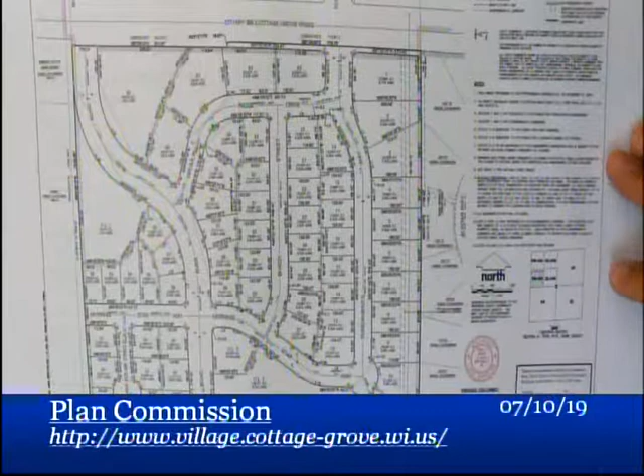Can we move Alex a little bit? That does a pretty good job of showing the cemetery. Is anyone from the cemetery here? This looks like the rear lot line of the cemetery. So it's quite a bit of it, actually, that's right along public right of way. There's maybe a little gap of private property in there.

So where's the bike path? It's on the other side of the road, which is the east side. The bike path extends along here.

Does the fence make sense? You can't really see that at all. Mike, if you point, just point on the screen when it was made, way back then. It's been a hot topic over the years. There's really a fallen down brush there. There's no clarification on who's maintaining it, which is what's even brought up tonight.

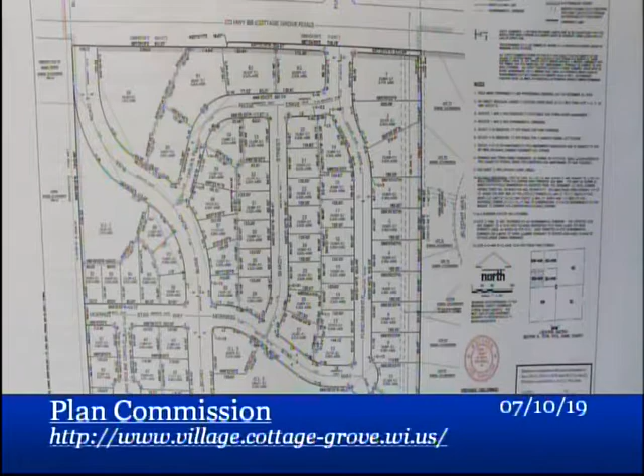My thought is that I would take item 12 and add to it clarification of the type of fence, this is a cottage style road, this is the location, and the cemetery's responsibility of maintenance. The Buss Road is here, and the bike trail's on this side.

So the only thing abutting the cemetery, I believe, it ends here. Is that sidewalk shown, on this side? The white area, that's sidewalk, yes. All right, so then it would be a fence along that sidewalk.

Where's the bike path? Cemetery in the past, that's the kind of bike path people wanted to cut through the cemetery, and it created a barrier. Yeah, exactly, at the end of our property, the brush that's there creates a barrier right now, so it's unlikely people are using it.

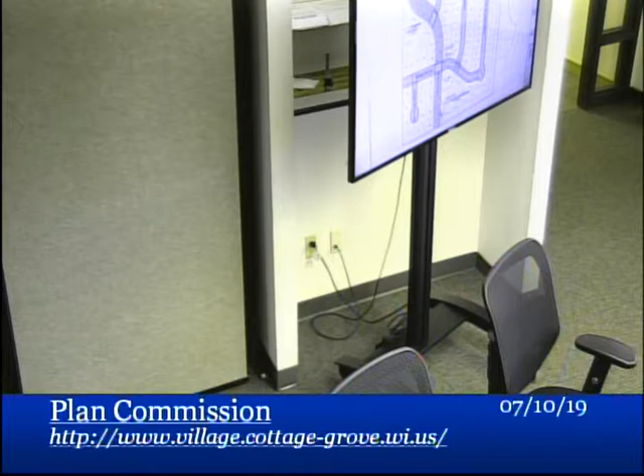I'm Jane Ring, we live on Buss Road. So my question is, up here, is that like a zigzag kind of thing? It's not going to go straight on Buss? Are you putting a stop and go light there? Are you putting a roundabout?

How's this attaching to the existing Buss Road? There's 67 feet that was dedicated from the center line of Buss, going east - they still aren't perfectly aligned. When we get into the final detail with these guys, we'll either have to put in an 85-degree angle or look at other options. So in 2021, we're planning things with it.

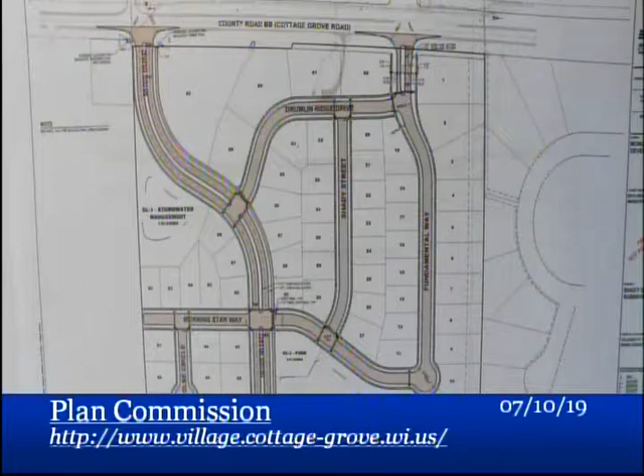We've got a TIA from the elementary school indicating we meet 4-hour warrants at that intersection. We have an impact analysis from the school indicating that when that happens, we're going to meet what's called a warrant analysis, a need for signals at Buss Road and Cottage Grove Road. So yes, there would be traffic control there, we'll have to have alignment with that, it will not be offset - the dedication helps with that. And you asked if it's signals or roundabouts - I think we'll have to have a separate public hearing to decide that.

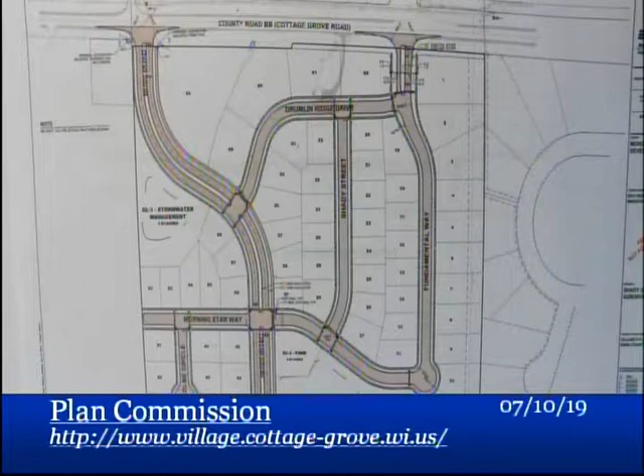So then Mike, if the property to the south ever did get developed and Buss Road goes through, would that one area by lot 40 just remain open like that, do you think? Or I know it all depends, but — in that particular location, typically we would come in and continue it on, but I think if we keep a plan for mid-block pass-throughs on the island, so they're not having to go down to the intersection for a U-turn just to get out, probably makes a lot of sense.

Okay. Then I had a question as far as lots 10, 11, and 12 — are those on Fundamental Way then, and not on Morning Star Way? Like, what would the address be?

Whatever the homeowner decided, they don't decide the addresses - they're assigned by the post office.

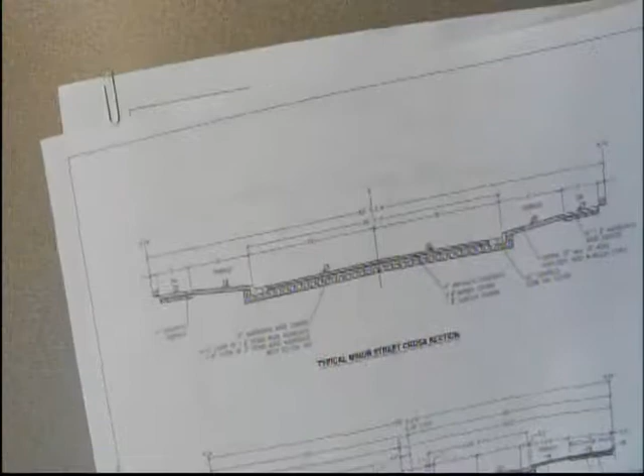Go ahead Tomas - I think it's 36 feet face-to-face. If I may change the view here a little bit, let me see, I'm trying to get used to this projector. Okay, can everybody see that? Yes.

What you see there is the typical minor street cross-section. This would be Fundamental Way, this would be Morning Star, Shady Street, and Max Colby Circle. All of those will have that same cross-section, which will have a 36 foot face-to-face width of the road, so the driving lanes would be 18 feet wide each.

So does that mean you can park on both sides and still drive through? Yes, I would assume it's plenty of room for roadside parking on both sides - assuming that, because a lot of people park on both sides, and then if you have an ambulance or a fire truck or something.

Each car will take about 6 or 7 feet of the road when they're parked. So out of 36 feet, you would lose about 14 on both sides when you add them together. So there's still plenty of room for a very large emergency vehicle to drive through with no issues. The village would also administer how parking is handled during winter months, which is a little different because of snow accumulation.

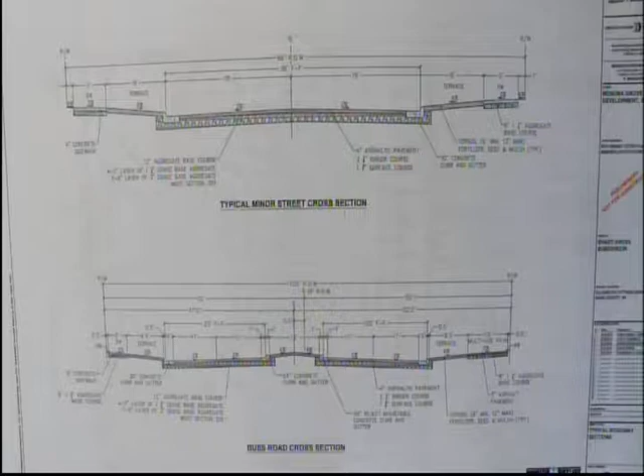So all the roads are the same width except Buss Road, as far as that goes? Yes, in the Shady Grove subdivision - only in Shady Grove right now, because you haven't continued into the other. Did I answer your question? Yeah, because that usually ends up being a problem where it's congested and nobody can get through. Subdivisions in the past had 32 feet or 29 feet of space on some roads, but 36 feet is pretty typical - it's the typical 2-side parking road that we put in.

Which is not like Oak Street, right? Oak Street's better - Oak Street is really wide. Oh yeah, that's probably 40 plus feet. Good, yeah, that's good. Okay.

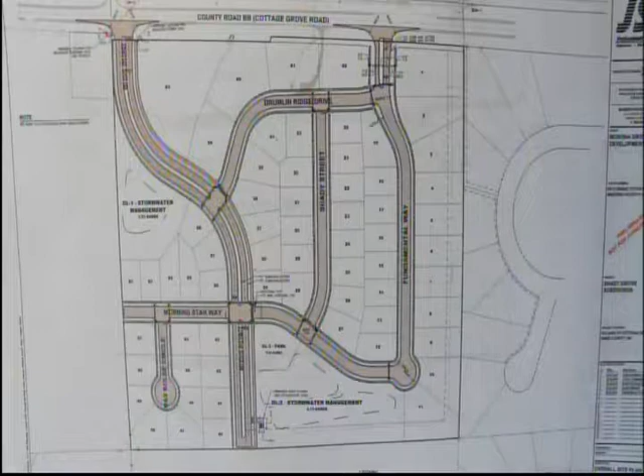All right, that's going to be a lengthy one, but I'll make a motion to approve. Do we want to close the public hearing? It was closed about 40 minutes ago. Yes, so I'm going to make a motion to approve with staff conditions, amending item 12 with clarification of type of fence, location of fence, and responsibility of maintenance of the fence.

And then also adding in looking into shortening the median to the south and/or looking into mid-block pass-throughs, subject to the conditions from our village engineer. Second. We have a motion and second. Any further discussion? Having heard none, all those in favor? Aye. Can you repeat that, Alex? Aye. Thank you. All right.

Item 10 is the opening of a public hearing, the opportunity for the public to provide input regarding the request from the Monona Grove School District for approval of a request to rezone approximately 53.7 acres at 4490 Buss Road from RH Rural Holdings to SR4 Single Family Residential, and for a conditional use permit to allow an elementary school as an institutional land use. So the public hearing is open.

So this is the current site. Off to the left is Buss Road. Down in the lower left would be Glacial Drumlin Middle School, and up towards the upper right is the development to the east.

Bob, you can use your cursor. Thanks, Andrew. Is there a microphone I should be talking into? Just to collect it for the video. Can everyone hear me okay? What you're seeing on this drawing are the existing structures and the tree line, just to give you some reference of where we're at.

So this is the proposed site, and again to put it in context, the existing tree line is somewhere within this area. This represents the existing school. The drive, or the stippled dark area you see, indicates drive, parking, and some playground area.

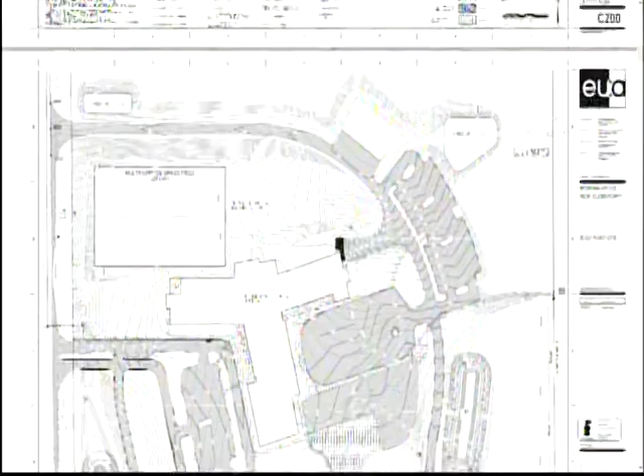Let me see if I can get to a different plan that might have... that's the proposed school, not the existing one. Trying to find one, sorry—we'll just stick with that one for now.

So north is up on the page. The school is entered off of Buss Road. We've got visitor parking along with a loop for parent pickup and drop off that accommodates about 50 cars able to loop around here. We also have a connecting road that goes over to Glacial Drumlin and connects up to their existing parking lot. There is also a loop that comes around the building.

This is primarily for bus traffic entering and exiting the site, so this is parking for the bus area. I'm not sure how that shows up very well. You'll notice that some of that parking is diagonal—that's for the buses. Basically, they pull straight in, and when they leave they turn their wheels and drive out, not backing up or anything.

Students enter on the right-hand side where the door is, and then the buses will depart. There is an opportunity, if they are going to Glacial Drumlin, to navigate in that direction, but for the most part the buses will be leaving the site and coming back in a different direction. That gives you the traffic flow.

This parking to the northeast is mainly for staff, and we're showing the extension of the bike path that comes through the neighborhood to the northeast onto the site. We're showing some stormwater retention ponds, and we're starting to indicate some grass area that could be for play fields. We're not necessarily putting in an athletic structure there, but it's just space for students.

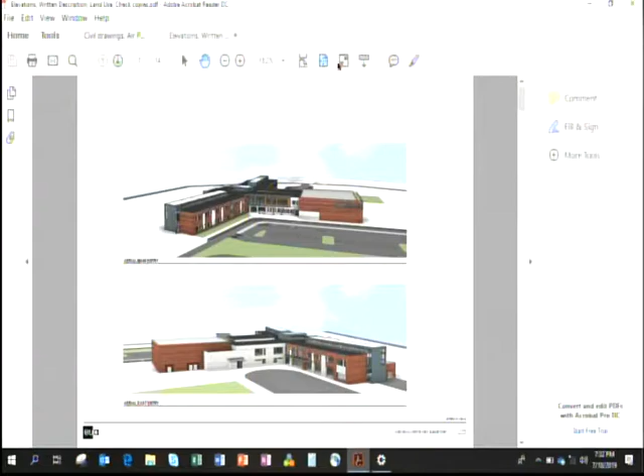So just kind of an overview of the site. Let me get to this. Relative to the building, give you a little bit of an overview of what you're looking at here.

If you remember, I talked about the entrance off of Buss Road for parent pickup and drop off. That's this loop that you're seeing, and this is that visitor parking. We are looking pretty much directly east in this view. This is the main entrance for visitors and those students being dropped off or picked up by parents. The entrance is here.

The wings that you see both to the east and west of that main spine are the academic learning spaces. It's a 2-story building. We've got academic spaces on the first and second floor here, and academic spaces mainly on the second floor, with some specialty like music and art on the lower portion. At the main entry, up above, this is the library, the IMC, and down below we've got offices. The rectangular box you see here is the gymnasium.

The view down on the bottom of the sheet is looking almost directly to the west. This is the entrance where students being bused would exit and enter the building. Again, this is the area where the buses would be parking. This is one of those wings, again relative to learning environments being on the second floor and the lower level. The IMC, and we also have art and music on the east side you're seeing here, and then again the gym box in that location.

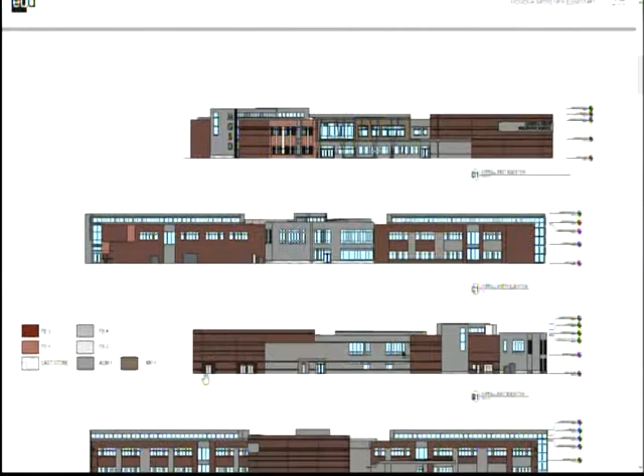There are some straight-on elevations that are a little more difficult to pick up what's happening, but they give you an overview of the overall elevations. We use these mainly for constructability information. The 3D images are really to give you a sense of what the building looks like.

As far as material on the building, kind of the learning environment aspect of these two wings, the first or lower levels, first and second levels. The orange that you see is a brick. That's not necessarily representative of the actual color—this is meant to be more of an artistic rendering of what that may look like. We've got some white brick as well, and again it's not necessarily white, but it shows up that way here. We're also proposing some metal panel on the building, which we're representing in that gray.

What you're seeing here is a clerestory, basically a higher roof elevation above that second floor that allows daylight to come into that second floor space. We're also wrapping that around the ends, doing the same thing on the other wing, so it's symmetrical in that regard.

The brown that you see here, again, is a metal—a wood look metal plank, if you will. Being that it's the entrance, we wanted to warm that up a little bit. I may have talked a bit about the theme or concept for the building last time, relative to the woodlands, the wetlands, the grasslands. We're trying to bring some of that to the architecture on the outside as well. We're also doing that same type of thing with that wood at the east entrance, off of the bus area. It just doesn't show up here because it's underneath that canopy piece.

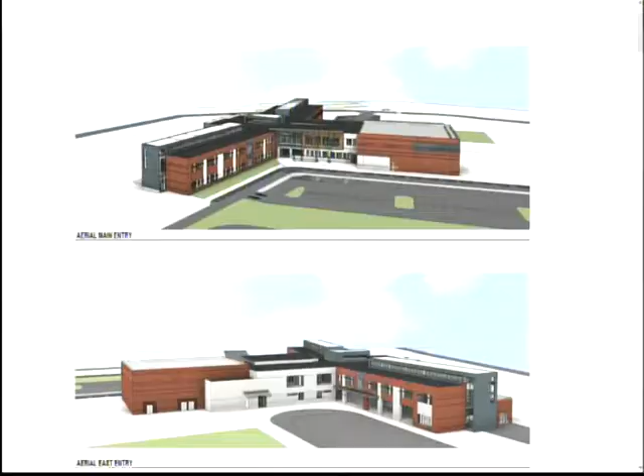Do we ask now? Sure. Can we have your name again? I don't know if we got your name. Jane Ring, please. We live close, right on the corner of Buss and Lane Street.

So when people access, and they're saying they're going to come by car from Cottage Grove Road up Buss Road, where is the turn going to be? Is it going to be right across from Lane Street so that everybody's turning, or is it going to be further south? I believe it's south of that street.

The district did purchase an additional just shy of 15 acres of the Blair property to the south, and so we were able to, per conversations, bring the turn before you get to Lane Street—closer to Cottage Grove Road, closer to the Masted property. Buses will come in and staff will obviously use the north driveway. The majority of the traffic you should be experiencing will come in at that southern driveway, which should be below Lane Street. So this is, Andrew, help me out here, but I believe the street we're talking about is right here.

Looks like that's close. Yeah, I think it's north of the existing property. I believe that's the cut, so that existing road you're talking about is right here. That's Lane? I believe so.

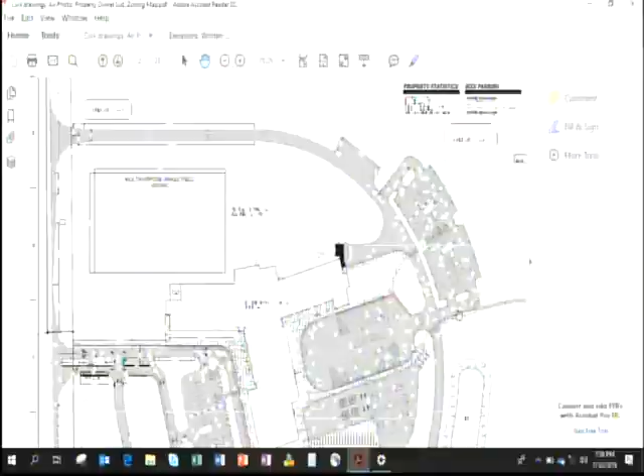So the access is going to be down here. It appears as though there's a curb cut here. I don't have the full map, but it shows here.

So this will be closer to the existing current road, it will actually be south of that Knoxville property before it. So we won't have everybody trying to get in before us. And then when they wrap around, it'll be the same as at Taylor Prairie, where people come in, they have to turn around and they have to turn to the right, not the left.

They'll have the opportunity to go in either direction. Because I know at Taylor Prairie, they only let you turn out to the right, because they don't like people making a left-hand turn there and having more accidents and problems.

Where is the bus entrance at? So the bus entrance is further north of this particular entrance. Or is it still south of the lane? No, that will be north, actually, of Lane.

So that's right by our house. They'll be passed by your house.

So here's the entrance for what I'll call visitor, parent pickup and drop off. This is the entrance for the bus. And I believe this is the road that's in question, so it's basically almost smack dab in the middle. So the bus entrance is basically going to be right across from us.

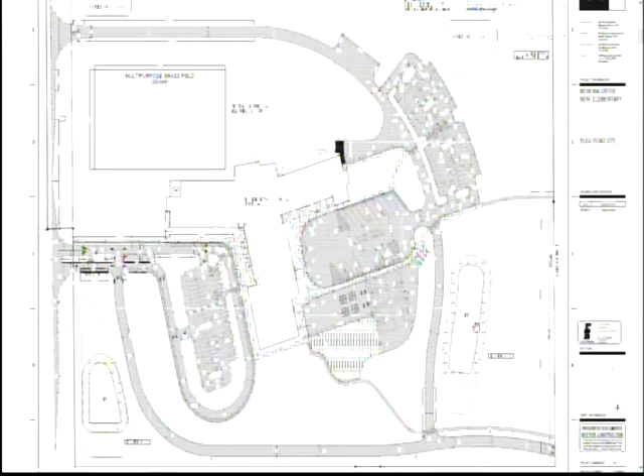Just so I don't have to think about this now - when you get to the point of widening Buss Road, are you going to put sidewalks and curb and gutter on our side of the development, not just the school side?

Certainly to the north, there's a parcel that's in the village on both sides of Buss Road, but to the south, where it's in the township, it's really up to the town to put sidewalks. We're still in the town.

Thank you, I have one other question too. We have a septic system - is there plans to hook up any sewer onto our side other than just the school side? The school is on this side of Buss, we're on this side. Is the village extending sewer service to your side? Correct, not in this plan.

Because we're still village - no, we'll still be the town, but across the street will be the village. Got it.

I think I just had one more question, Lori Miller again. I thought I saw a plan at some point that never had any drives coming out onto Buss. Was that a dream, or did it plan? Was that hopeful thinking? I think it was probably hopeful thinking.

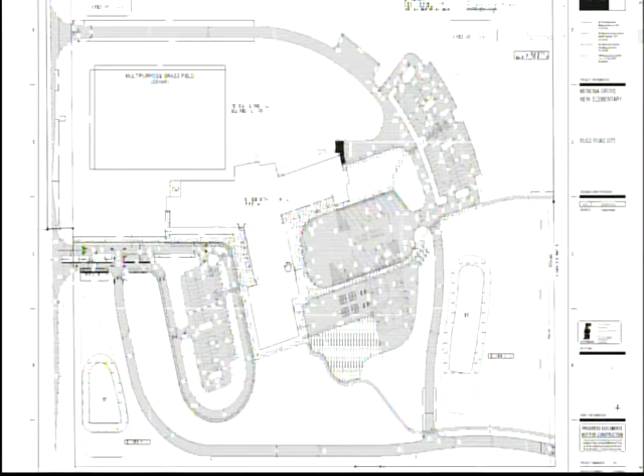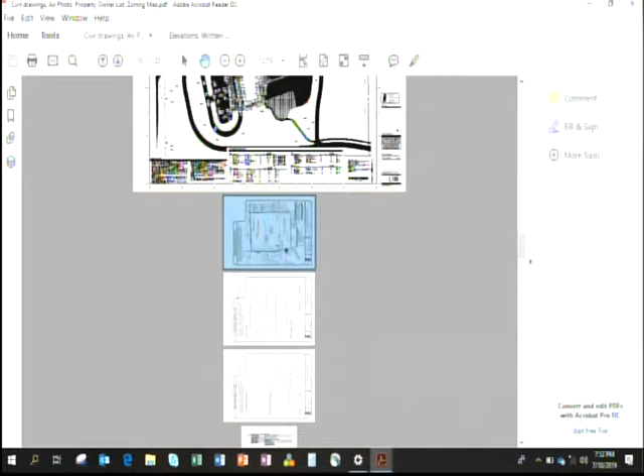This looks like you had a question right away. Do you have a map of your whole property by chance that shows the empty fields above that are north to the school? A small drawing - I don't have a plan with the building located on the entire site. I was looking at the traffic impact analysis that shows some things, but the exhibits in the TIA showed the south driveway and north driveway and then Lane Street further north of that, so I just wanted to get an idea of where exactly it was.

Yeah, but they're just straight lines, so they don't show very well - sorry. It looks like the proposed school is more along in the 15 acres that was recently purchased rather than the first 40. Correct.

So then the driveways would both be south of Lane Street. Again, the building, I believe, sits somewhere within this area, and then we've got the roads, the entry points both to the north and to the south. Oh, because yeah, that shows Lane Street there. Yes, and then the connection to Glacial Drumlin occurs really close to the south border or south property line. I would imagine the second route's going to be right there. I think it's coincidence, but those two arrows are about where your bus lanes are.

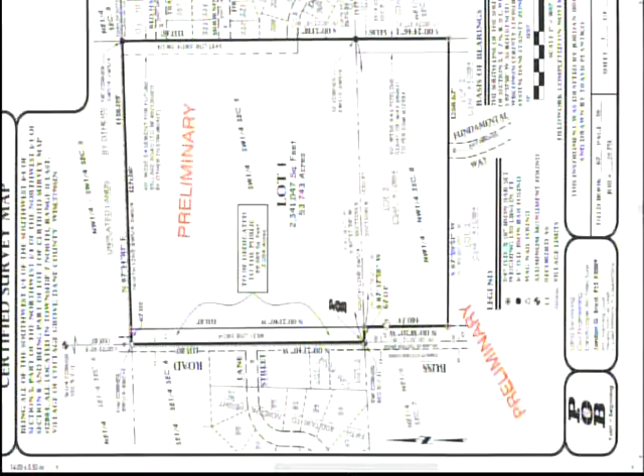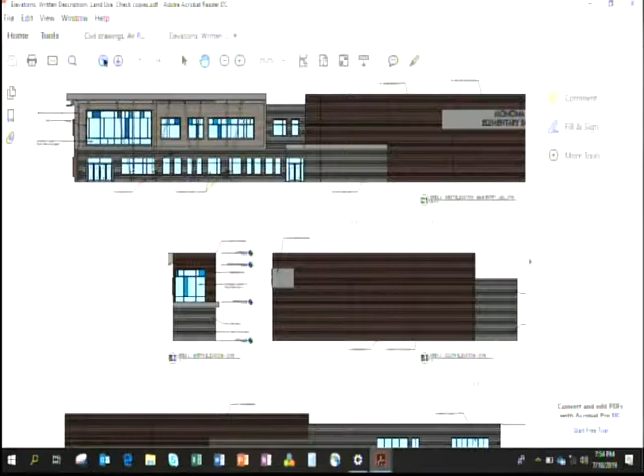Is there a way to request a pictorial that shows where Lane Street sits in relation to where these buildings are? Sure, that's something you could get us for the board meeting. We could add it to that board.

Before we get into all these potential motions, staff and Mike, comment on your reports. Maybe better to take them one by one. There's four different actions to take, four different agenda items. It'd be less confusing to take them one by one, starting with the rezoning.

The rezoning, we'd recommend approval. There's no conditions. Eleven and twelve kind of go hand in hand. This would be considered an indoor institutional land use, which is a conditional use regardless of what underlying zoning district it would be in. So to a certain extent, it doesn't really matter what district they're changing into. SR4 is what the other schools are zoned, and there's single family around it. It just kind of makes sense, but they'll need the conditional use permit as well to make the school work.

For purposes of item 11, we'd recommend approval with no conditions. So I motion to approve. Motion, second? Motion second. Any further discussion for the rezoning? Having heard none, all those in favor? Aye. Motion carries. Item 12, discuss and consider request from Monona Grove School District for a conditional use permit